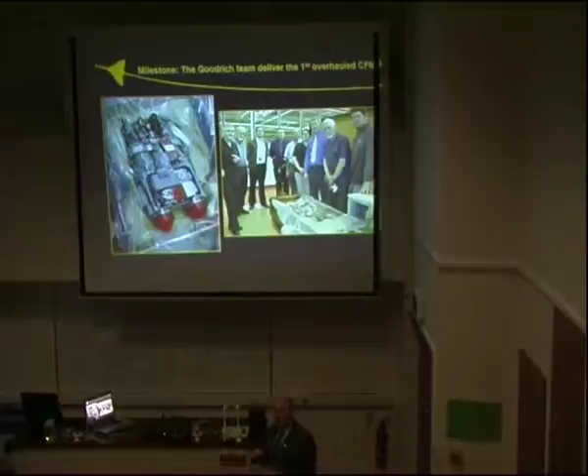So what we decided to do was actually send them away to Goodrich and get them overhauled. They'd done all the valves and the little seals and all that, reset and brought back. We're talking now in 2006 with inflation, we estimate it was costing us 5 million to actually do the project.

Except come 2006 at the end, we had an uplift in costs from one of our major contributors who doubled their estimated costs. We had a cash flow very similar to what we just had, and we needed to raise 1.2 or 1.3 million in 3 weeks. So I'd just come out of the Air Force, turned down promotion and everything to work the project, because it took him 2 years to get me out, and then he sacked me 4 months later.

So obviously we went to the pledge, hit the TV, Sky, BBC and all that lot, raised all the money. The club did a lot of pledge scheme, and they got 700,000 - 200,000 pound in cash came in. On one of the news items, I think it was Sky or somewhere, a young kid was there saying, I've just donated all of my pocket money, which was about 78 pence.

And Sir Jack Hayward had seen that. I said, well, if a kid can give all his money... He gave us £500,000 the day before we were about to close. So that actually turned out on the 31st to be a celebration, not a wake. We were expecting about 1,000 people because the aircraft had been in the hangar since '99, and to look at it, you wouldn't know what we'd done.

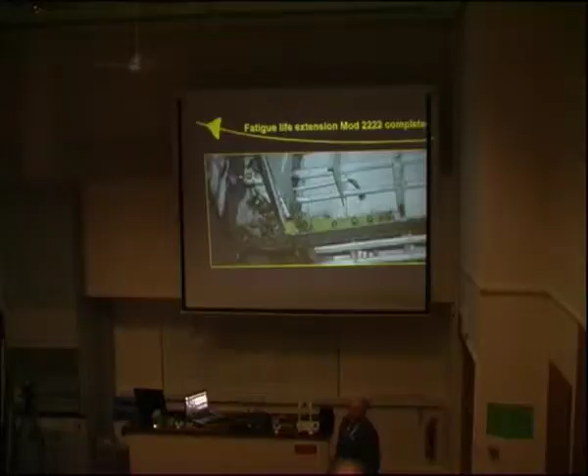One of the things that came out when it left the RAF in '93, it needed a major servicing, and it also needed a modification on the rear spar - this is where the wing actually bolts to the main airframe. What it needed was a nice long strengthening plate either side of the rear spar. MOD quoted £1 million so many years ago, and we had to do that.

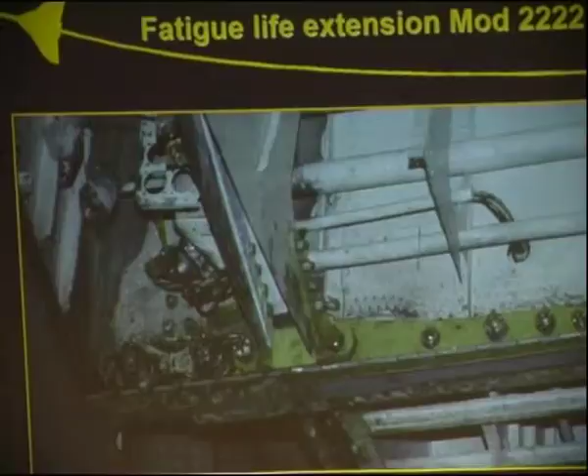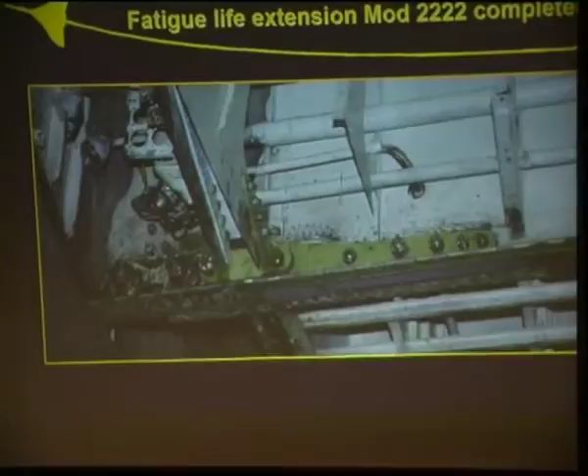The strap we actually see there had to be milled from a solid bit of metal. It's a step size, and then the holes had to be drilled, honed and everything. It took about a month to actually make that plate. Trouble is, the wing was actually unbolted from the aircraft for nearly a month, which was a slight worry on our behalf, because if it had moved in any way, we would never have been able to get it back together again. But thankfully it went back together again, so we could go and get all that lot done.

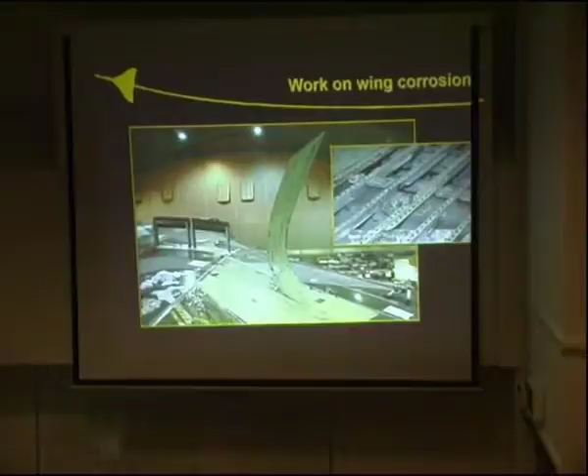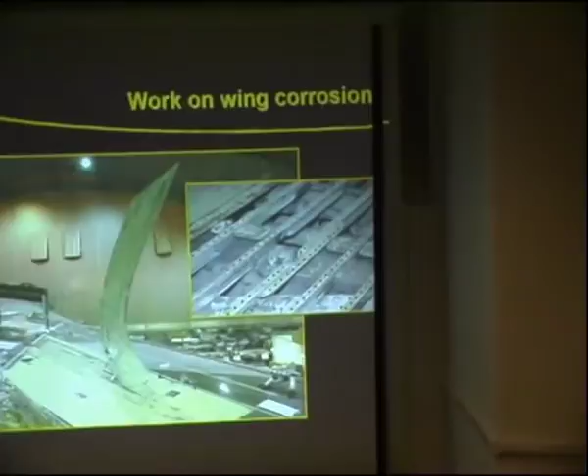Then we could get onto the corrosion we knew about. This was in the undercarriage bay, obviously with all the spray that gets up there. We'd taken out the lower panel, false floor, had a look, saw some corrosion, but could see it was moving along, though we couldn't quantify how far it actually went. And obviously we couldn't clamber all over the wing and peel the skins back while it was unbolted, so we had to wait until that was done.

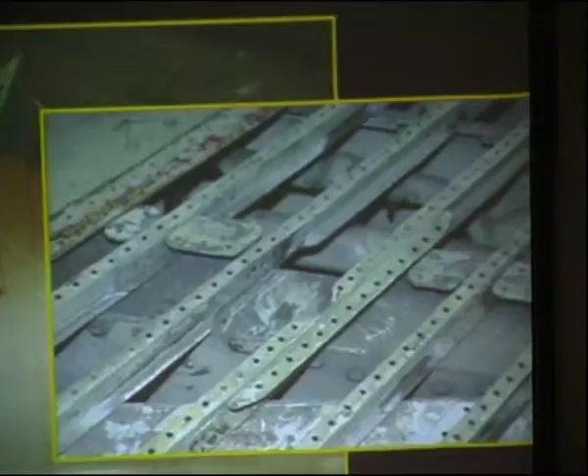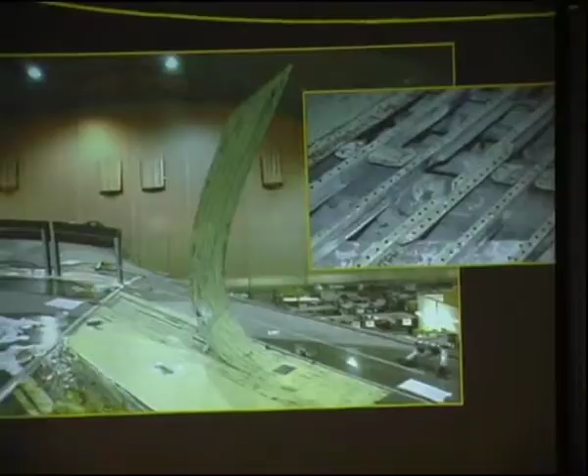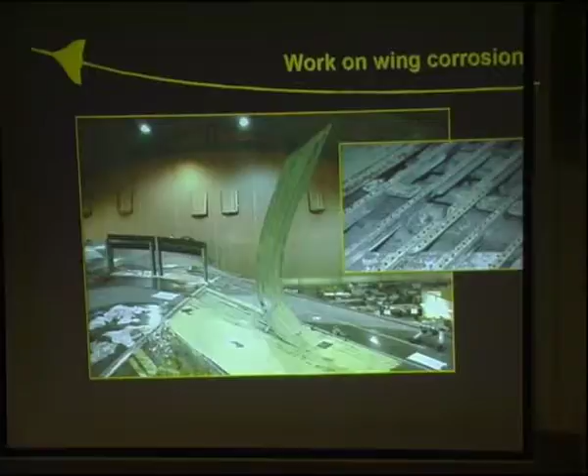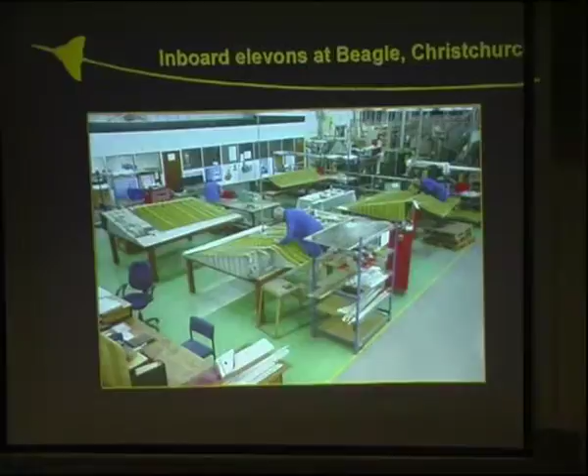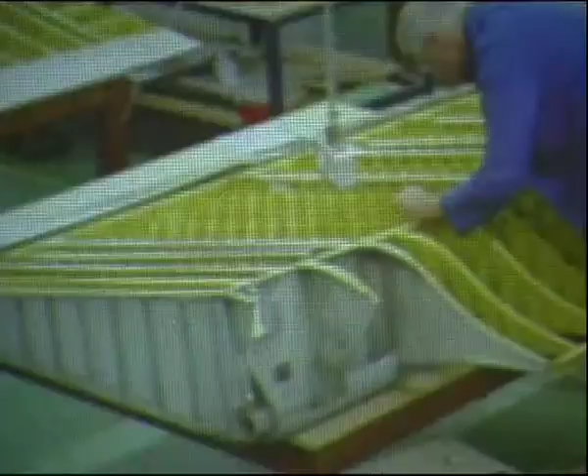Flying controls, the elevons - again, these needed a lot of work done. Magnesium alloys again, and all the stringers inside, the majority of them had to be reverse engineered and rebuilt because the corrosion was so bad in them. We sent down our spare ones as well so they could make the best setup. The initial quote was £67,000 to take the skins off, overhaul them and send them back. After the rebuild, it ended up being £250,000.

So this is where the money ended up going - it's gone up a bit more due to inflation. The new cockpit.

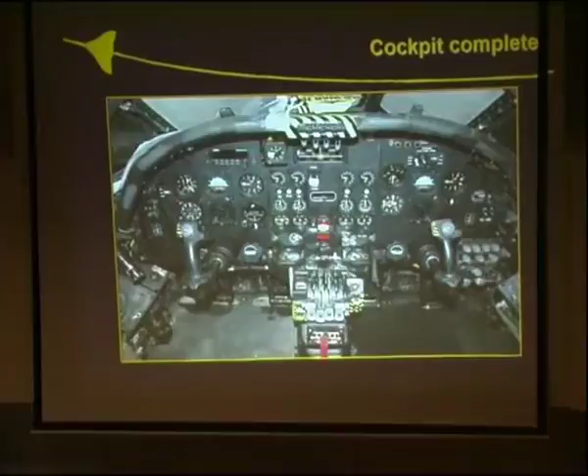We had the old cockpit, and some of the old navigation equipment was controlled by valves. Obviously we didn't want that, and with the CAA's new legislations, we had to replace some of the cockpit instruments.

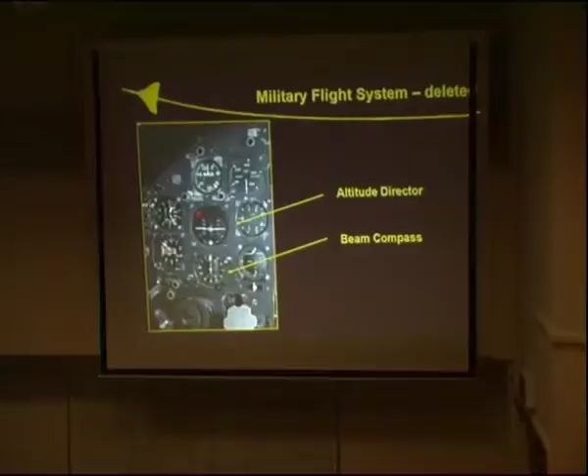So there we have the old instruments - the old beam compass, attitude director and everything. And now we have the nice shiny new one.

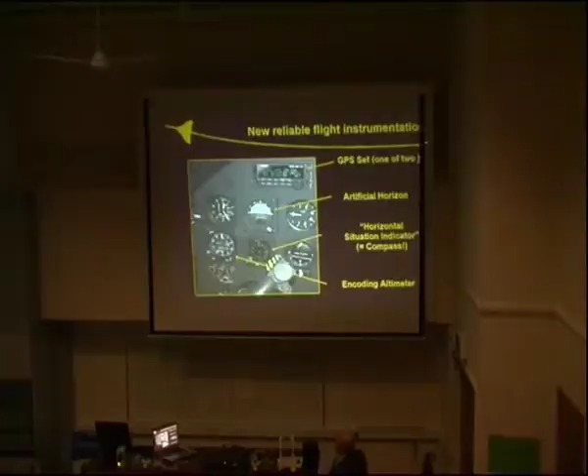We've got a nice Garmin up top, we've sat the navigators in the back, and fitted 2 Garmins. We have a nice artificial horizon in colour, easy for the pilots to read. Because we've had to buy stuff from America, we now have a horizontal situation indicator.

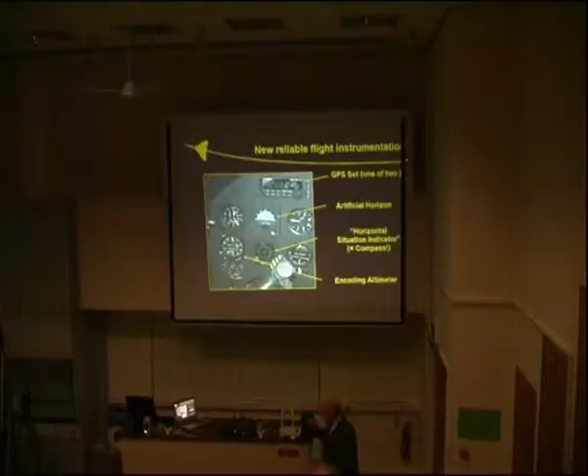It works identical to a compass, but obviously because it's American, that's a posh word. We also have a height encoding altimeter as well, which relates to the Mode-S transponder.

What that does is, where you've seen on air traffic the little blips on the radar giving a certain number and height reading - that's why we've had to fit that altimeter to our aircraft, so we can relay that message to air traffic control.

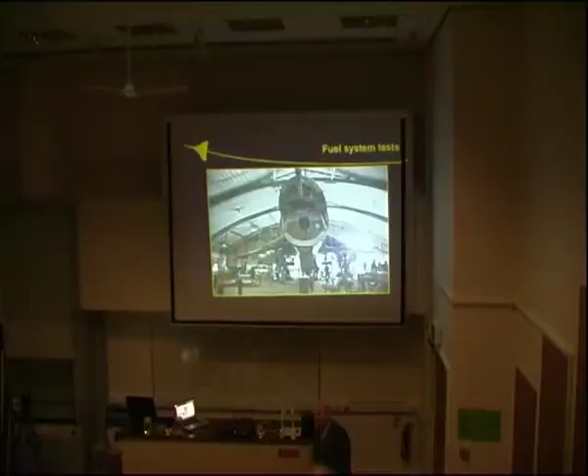There she is, the fuel system. Like I said, we'd replaced all the fuel tanks and all the fuel pipes. There was something like 60 flexible fuel hoses that had to be removed and replaced.

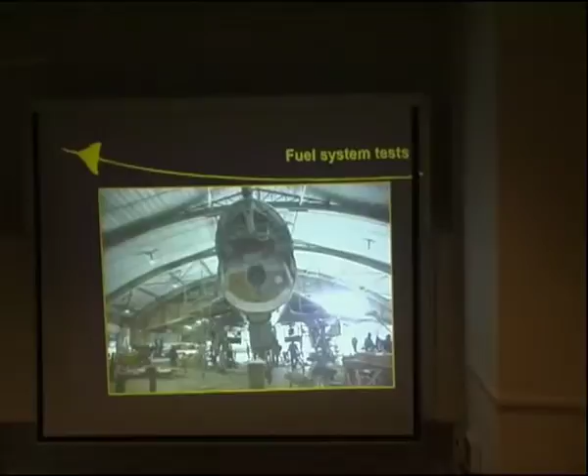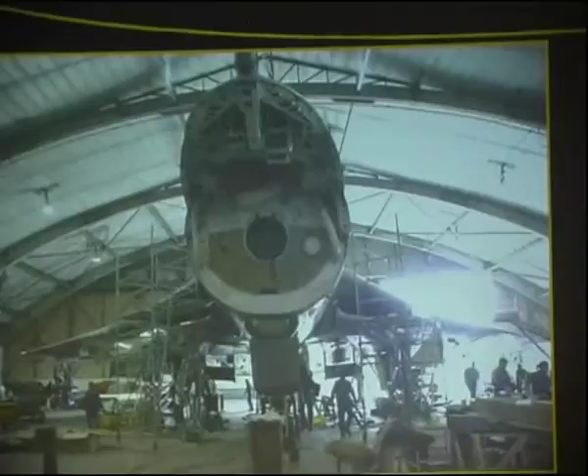As you can see, quite a few of the lads were running around with big yellow buckets as we were testing all this. Generally it wasn't too bad - we only had 2 leaks that washed the floor, the rest were just slight leaks which we managed, and everything was fine. Obviously the aircraft's got a big cheesy grin, now it's widdling on the floor.

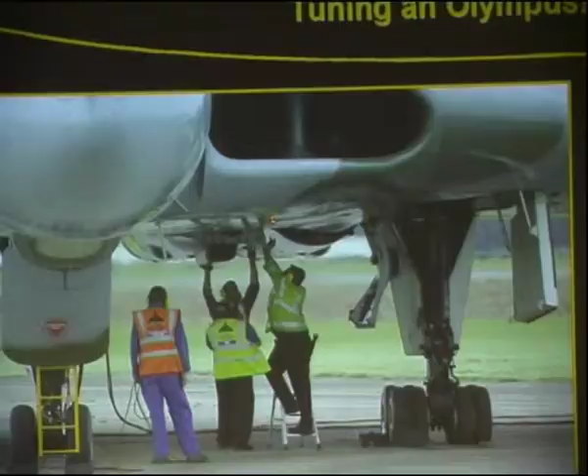Okay, comes to running the engines. These engines were overhauled back in 1980, 1981, put in anti-deterioration bags and checked down again, replaced the silica once or twice, gave it a quick turn by hand to make sure it hadn't seized for over 25 years.

So we put them into the aircraft, done a couple of wet runs and dry runs, just getting the fuel into it, making sure we get all fuel in, and it does actually spin. Fired them all up, and all 4 engines started first time - bit of smoke, but everyone started.

So we shut them down and got drunk. Second day we went back, fired them all up again, and started opening up the throttles a bit. Gradually over a week we managed to get all 4 engines up to maximum power within a week, doing it stage by stage.

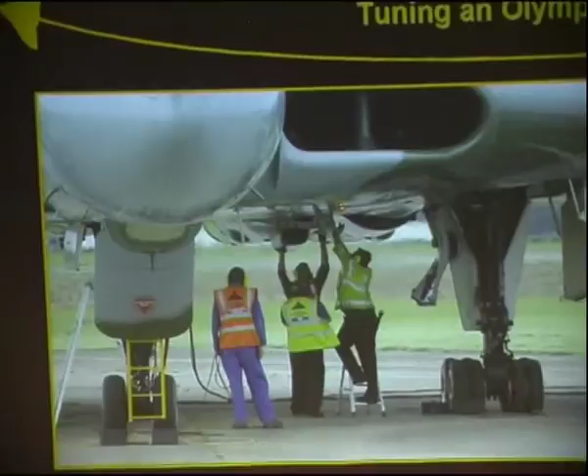Once we knew they were all going, we went and set all the idles and all the parameters. Once they were all mechanically set up, they were handed back to myself to finish off the electrical checks with the alternators.

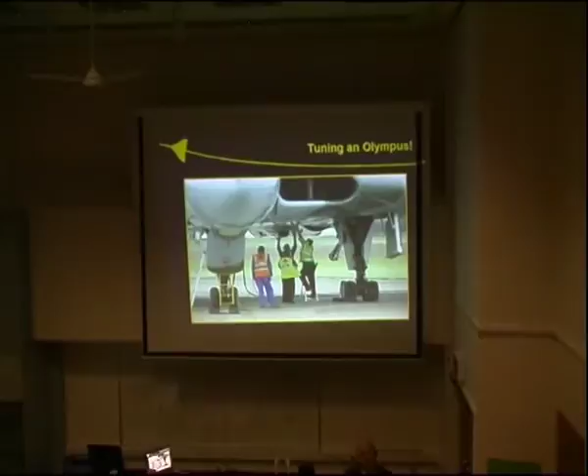And on the very last check, which was a 10-minute check, we had a hydraulic failure above the number 3 engine. What happened was an aluminium low pressure pipe was fitted into the high pressure system.

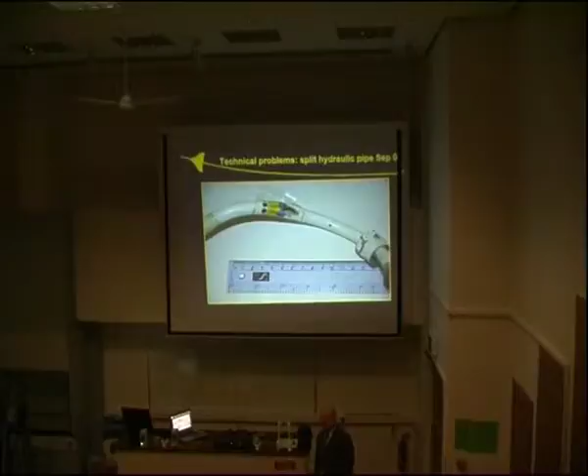We dug the paperwork out, traced it back, and found that the pipe had actually been labelled up wrong from the old days. It was supposed to be a high pressure pipe, but obviously it wasn't.

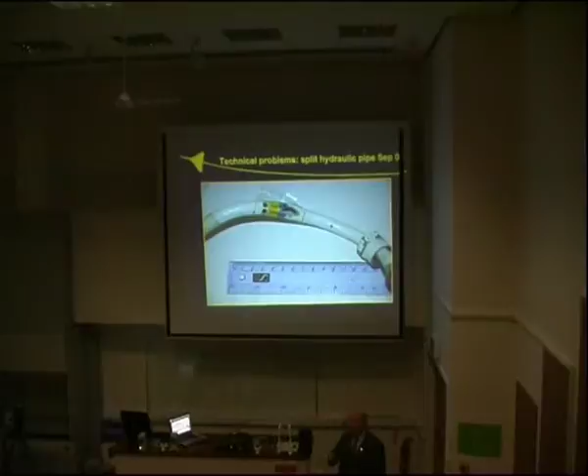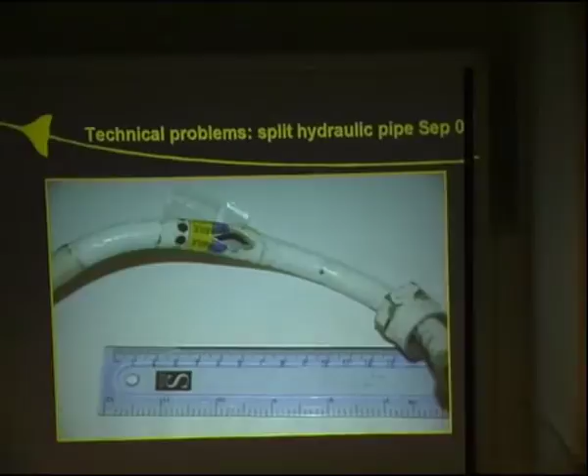So then we had to inspect every single pipe we'd replaced in the high pressure system to make sure this didn't happen again. Luckily it was all on the ground because it emptied its entire hydraulic system all over the engine, so we had to take that out and check all that lot.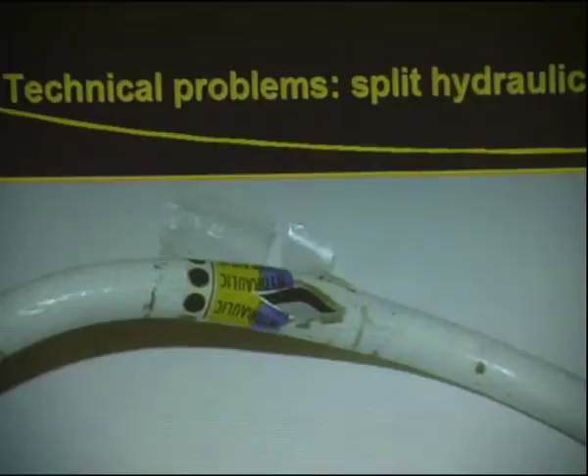Of course, because we'd done that, we had to do all the undercarriage functionals again because we'd stripped it all down, and the engine functionals again because we'd had the engine out. So all in all it took us another extra week or two.

I'm connected via a long lead into the nose wheel area where I connect in. Normally when you see an aircraft taxi, you marshal it, tell it which way to go. It's the first time - although they've been taxiing other Vulcan aircraft - it's the first time they played with our aircraft down at Bruntingthorpe.